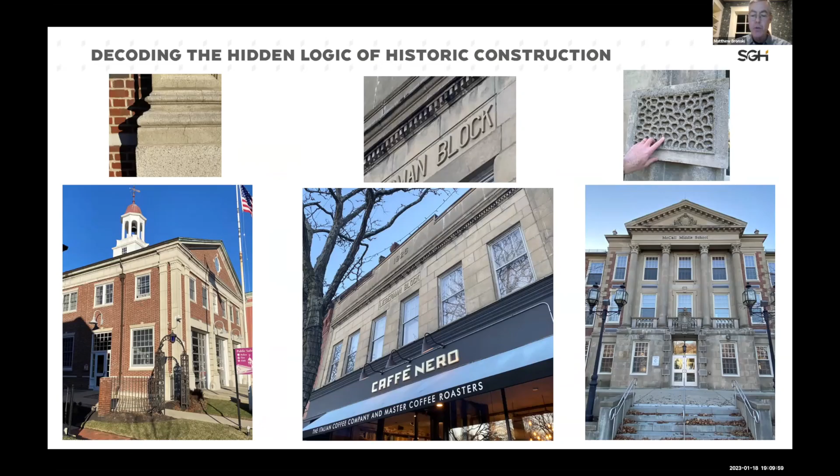There's Caffè Nero, really beautiful building, the Liederman block. And on the right, McCall, and a close-up of each of these. So kind of the big hint here is all three of these and the two prior materials that I just showed are all the same.

How about next? Let's look at our two bridges in the historic center. Same material. So if you guessed concrete, if you called it cast stone, if you called it architectural concrete, really technically it's all the same material and you would have been right.

So, you might not tell your friends, oh, Winchester Center is a really beautiful place. There's a lot of concrete. That's not how we usually describe it, but there is quite a bit there. It's just really beautifully designed, beautifully patinaed early 20th century concrete.

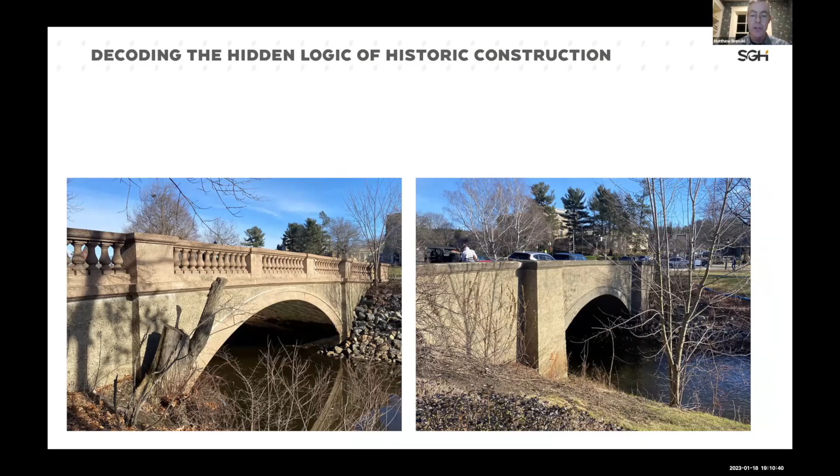So how about here? What material are these? So this is the Winchester Unitarian Church. That's the original 1898 portion of the building on the right, and that's the 1928 portion on the left. So from this distance, and I'm pretty close, probably 12, 15 feet away, those really look the same.

But in reality, the one on the right is natural limestone, and the one on the left is what's often called cast stone in the early 1920s, and what's really concrete, but it's just concrete that they went to great lengths and efforts to make it look like stone. So there isn't really a technical difference so much as there's an aesthetic difference.

So I hope these close-ups will help you in being able to tell the difference between the two. So on the left, you can see, and from that distance, they're really virtually indistinguishable. And even maybe from 6 feet, it's just really hard to tell, because they tried to make it look like stone, and they were pretty darn good at it in the early 20th century.

But when you get up really close, like you see here with my fingernails, the cast stone or architectural concrete on the left, what you're really seeing is little pieces of aggregate, little pebbles, little pieces of crushed stone, and sand, and cement that's usually tinted a beige color to make it look more like limestone. And you can see that up close. All the particles are about the same size pebble. They're all about Rice Krispie size or a little bit smaller even.

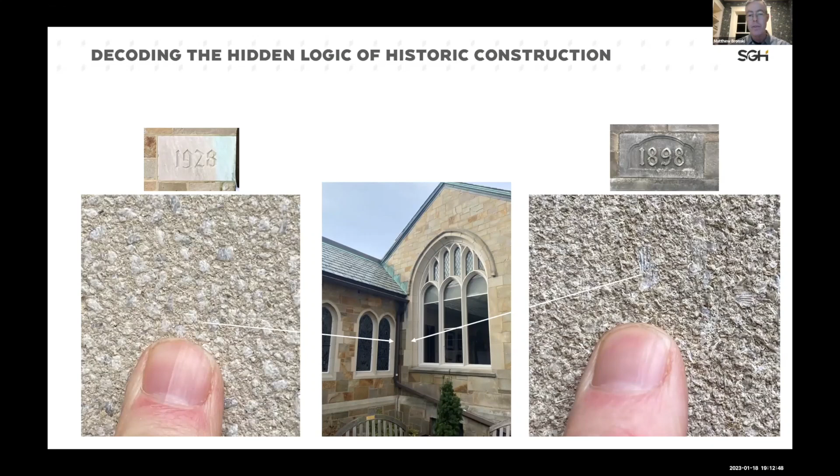And as you walk around Winchester Center, you actually see a lot of both. So we do have a lot of natural stone in the center. We have a lot of really good cast stone, and it can be hard to tell the difference. So going from left to right here across the bottom of the screen, here at the bank on the left, those columns are actually natural limestone. And even from this distance, you can see the swirly pattern of the natural sedimentary grains in the limestone. And the base is natural granite.

Now on the second one from the left, so this is the block where Starbucks is and where that courtyard is. So that's natural granite on the bottom. That might have been a later modification, just a guess based on the polished nature of that and the thin slabs. But up above, that is cast stone masquerading as limestone. And even from this distance, you can start to see the little tiny Rice Krispie size pebbles in there.

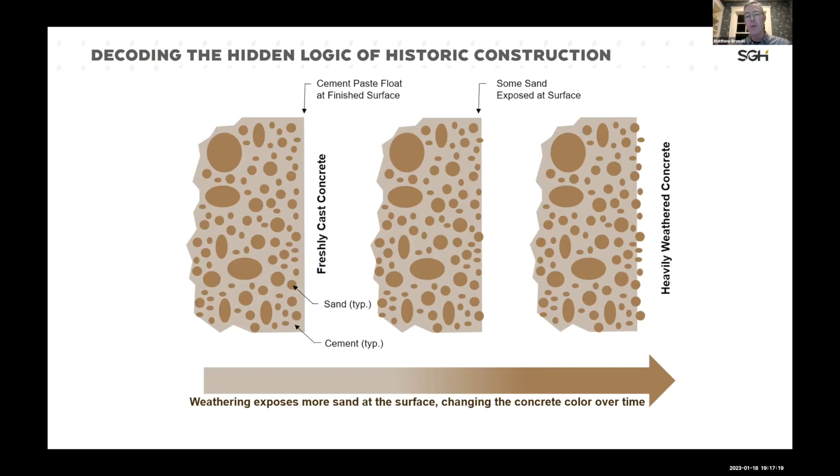So how about this beautiful bridge that we all know and love here in Winchester Center? You're seeing the aggregate exposed. It's taken on the color of the sand, that pinkish, warm aggregate color, really prominent today, and also a nice visual texture to it.

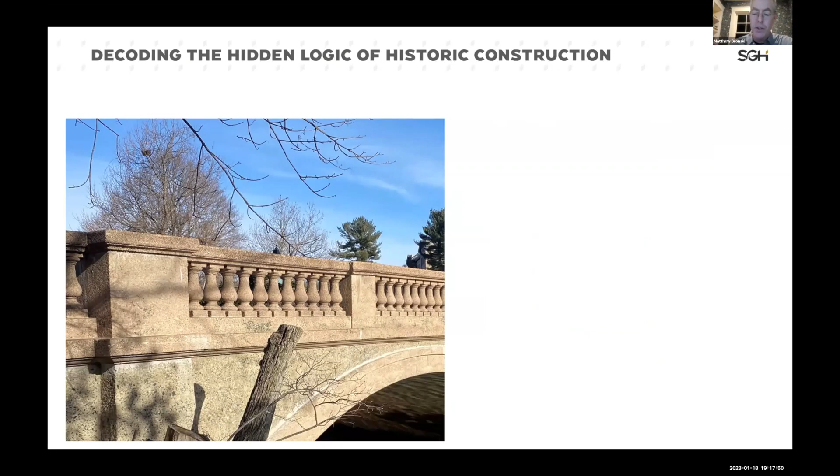So I contend that this looked pretty cold and harsh and smooth and not textured at all on day one. As evidence, I'll offer up a book that many of you probably have on your bookshelf at home. Let's look at this photo you've probably seen many times before a little more closely. Look at how flat and flush and stark and smooth that is — that's really the paste float. We can't tell so much with this sepia-toned photograph, but just by the amount of paste float there, you can tell it hadn't yet weathered to expose the aggregate. That was just the pure paste color on day one.

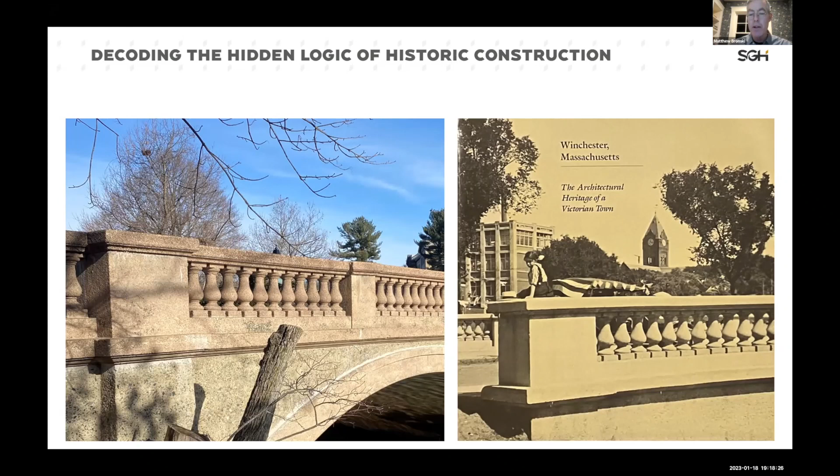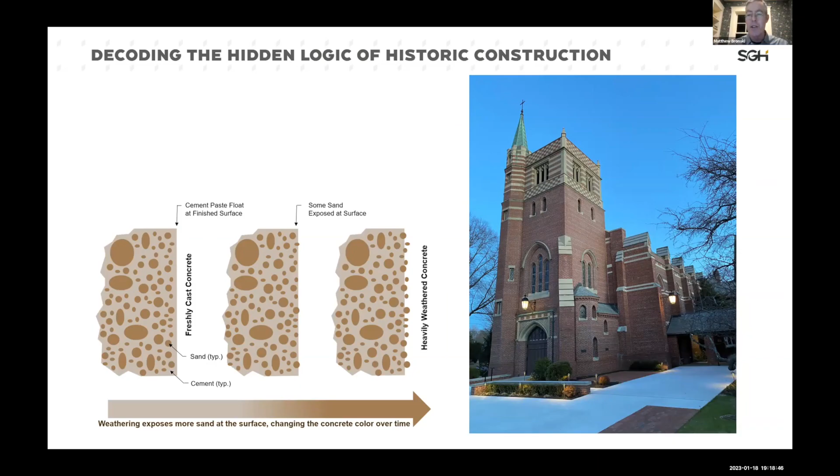So I contend that this bridge probably looks a lot better today than it did on day one. And when we see some brand new concrete, like the sidewalk here on the right, you might say, gee, I wish they had tinted it to match the more beige, warmer color concrete on the facade. But over time, it will gradually work its way toward that, and it will gradually get there. Mother Nature will help it along. So fear not.

You might have learned way back in architectural history class that the Greeks built with stone beams, post and beams and columns and lintels. And then the Romans came in and showed how to build with the arch.

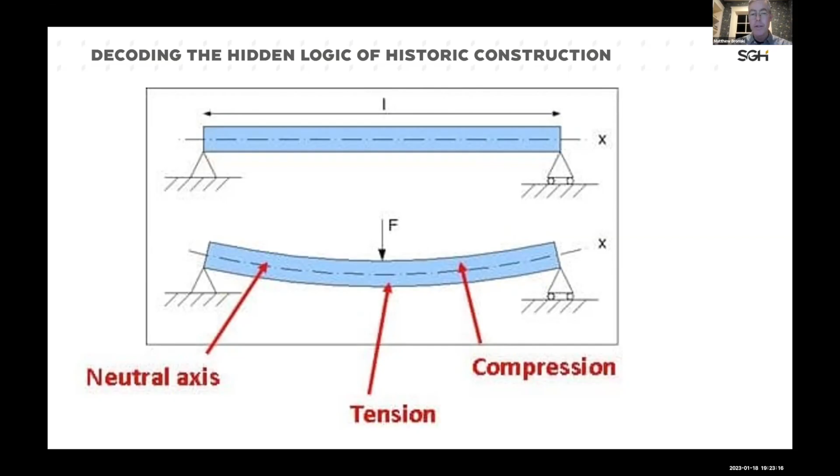So how do you build efficiently and effectively in stone? As you might have learned from the Romans, it's really with arches and vaults. The thing about arches and vaults is they use the stone material in the way that it's strong, which is in compression.

Just a little engineering background here. Robert Hooke, an early innovator in physics and structural engineering in the 17th century, said that as hangs the flexible chain, so but inverted stands the arch. Here are a few diagrams from my colleague and friend Paul Kasabian, who also teaches structural engineering at some local area colleges.

If you imagine a cord or a chain or a cable and we hang some weights on it, it will approximate a shape relative to the weights, their location, and the weight of the cable or cord itself. Here are just a few examples of that. What Hooke was really saying is...

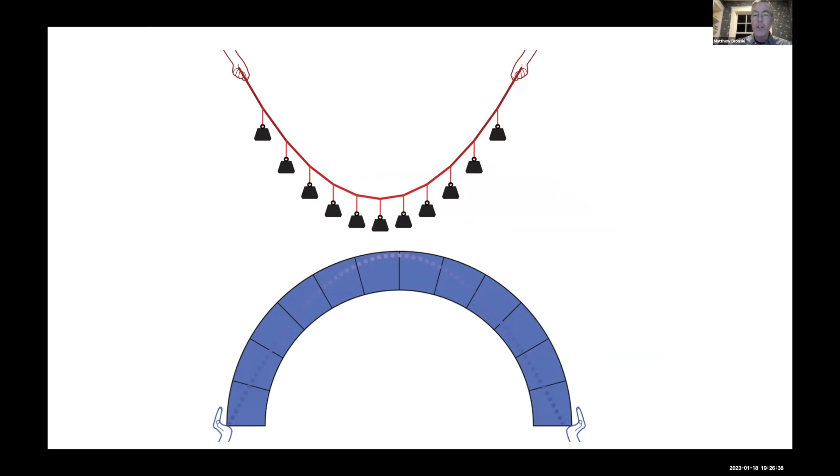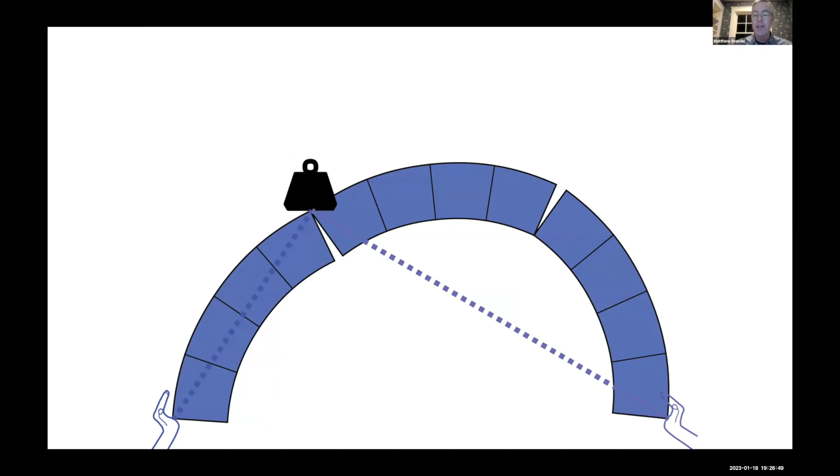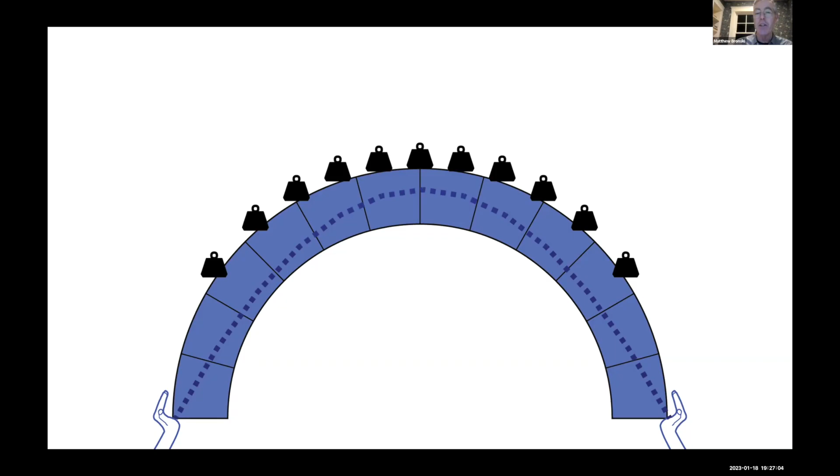If I go back for a second, that case is with a uniform loading, meaning we're loading the whole thing at once, pretty evenly, so it works really well for that. If it's designed for that and you load it eccentrically, meaning way off to one side with a lot of weight, that's when you can get a failure in an arch, so that's the case you want to avoid. Arches are very happy when they have a lot of weight on them uniformly and concentrically. They don't like a lot of weight in one place off to the side at an angle. Even a lot of weight right down the center is okay.

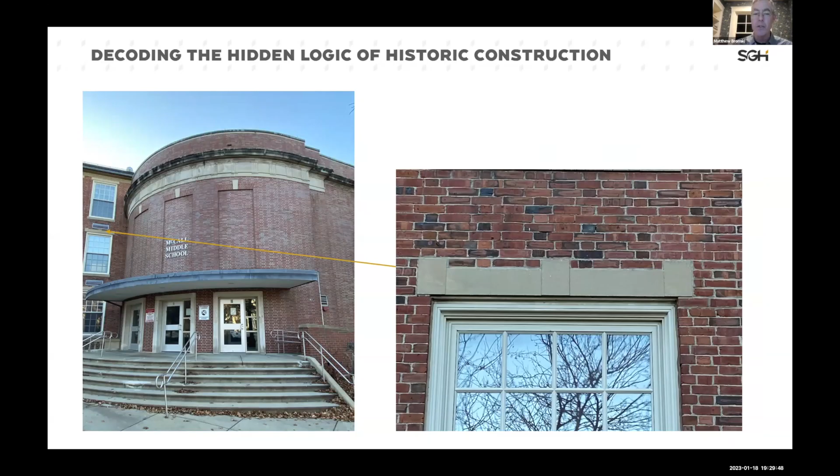It looks to me, I couldn't get up super close to check these for sure, but it does look like this one is actually a concrete lintel that's just kind of decoratively cast in that form to make it look a little bit more like a flat arch with a keystone.

How about these two on Lincoln Elementary? From a distance, that bottom one sure looks like a lintel, right? It's just kind of a rectangle, maybe some relief or carving in it, but it's fairly uniform, just going right across the opening. That upper level looks like it could be a flat arch, kind of looks like a keystone, and the edges are splayed. So from a distance, I would think lintel on the bottom and flat arch on top.

But this is really interesting. When you look at these closely, first of all, they're not stone and they're not cast stone. These are architectural terracotta, and they are flat arches. What's interesting is the one at the top more or less corresponds with what you see from a distance, but they've just created an extra joint, so from a distance it looks like 3 pieces. Up close it's actually 5 pieces, with an interlocking, almost puzzle connection between them, so as they were setting them, they were stable just as they dropped them in, which is really clever.

On the bottom, it's actually kind of the same thing structurally. When you look at how the pieces work, it's a flat arch with very similar joints, but they've just articulated it differently to make it read different visually. So very, very clever engineering and architectural interface here on the side of Lincoln.

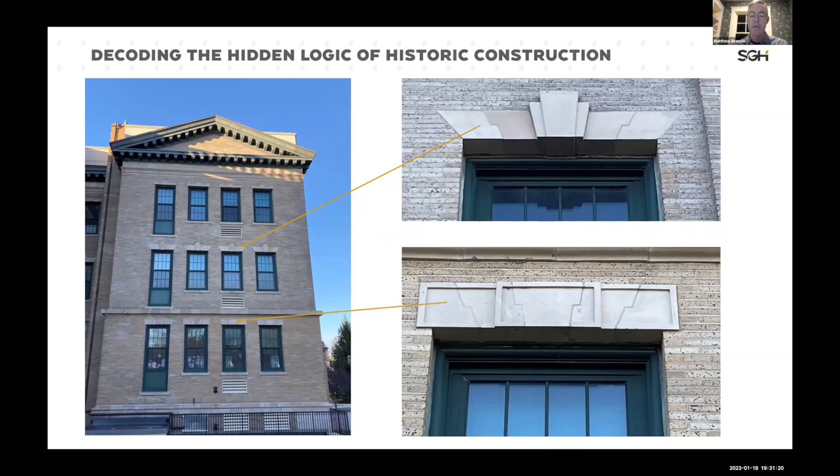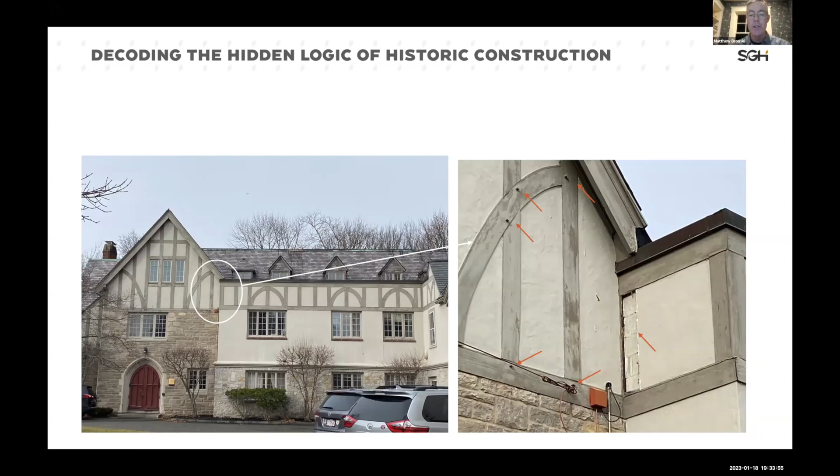So what about the overall form? Maybe just to refresh your memory before I move on, take a look at the profiles. Look at how the first floor steps out a little bit, the second floor a little bit more, the third floor or gable ends more, and even the roof more beyond that. So it's a constant out, out, out, out on all these facades.

So is that just purely stylistic? Where does that come from? Sometimes you hear people say that back in that period, they were just trying to eke out any sort of space they could get in the dense medieval city. It was very congested and crowded, and they were just trying to pick up a little more space on the upper floors out over the street.

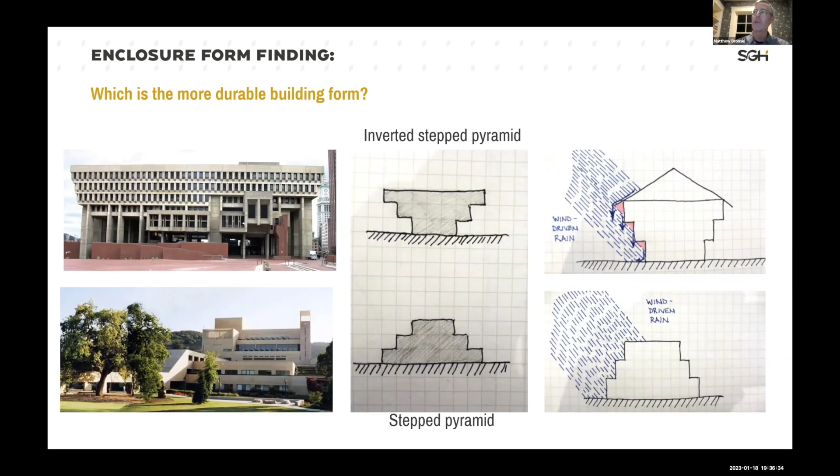So it was essentially like wicker, like you were weaving a basket. That was filled and packed with, sometimes clay, sometimes a lime-based stucco, but all those materials really didn't like to get wet. So this form was a way to take those moisture-sensitive materials and really protect them well from the weather.

So you look around and we have a lot of building forms like this in New England. Here's the Paul Revere House, the second oldest building in Boston, from 1680. You look closely and it really has that inverted step pyramid form. The early English settlers had learned that building form and brought it over here with them. Even though they weren't exposing the frame anymore and didn't have wattle and daub - they had clapboard protecting it - they were still building in that same form.

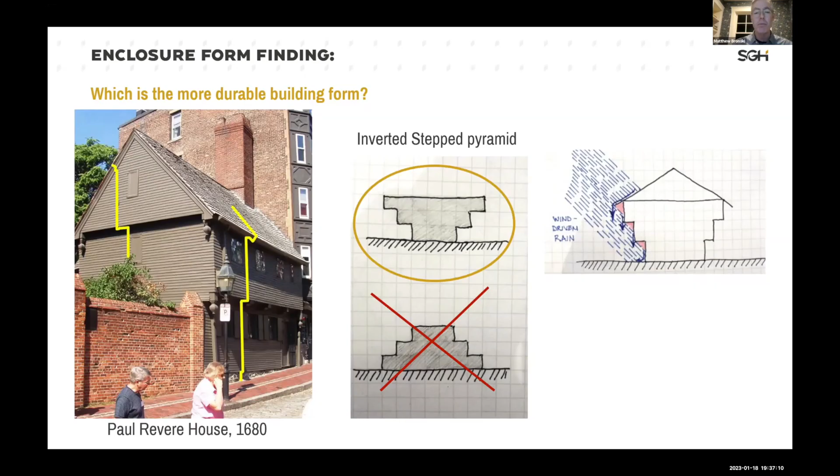And actually, as you look around, really other periods and styles show this too. Going from left to right: the Paul Revere House, then early 19th century Greek Revival, late 19th century Queen Anne, and on the right, some early 20th century eclectic or period revivals, like the Tudor revival. You'll see that form again and again. It's sometimes very subtle, but once you start seeing it, you'll walk around Winchester and say, oh yeah, there's another one - and you'll see them again and again.

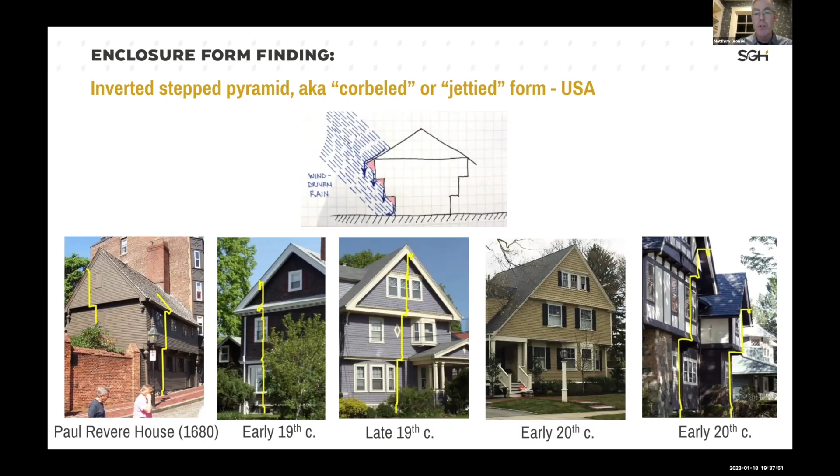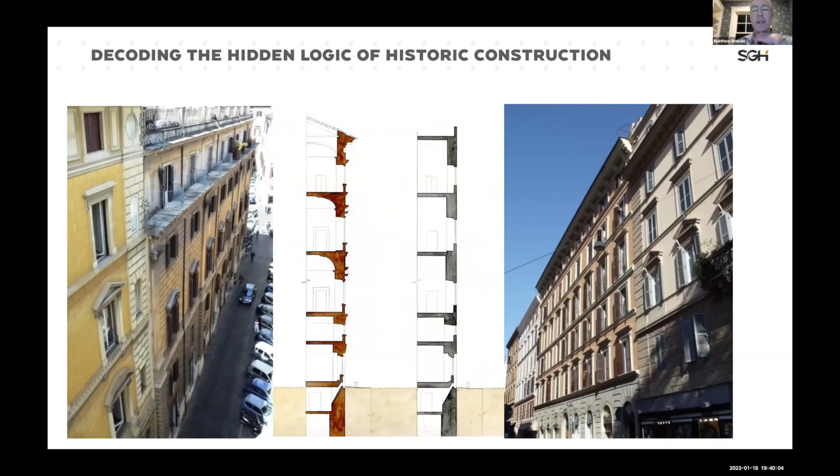So if it did not have any construction logic, you could take a facade and just strip all that and say that's just kind of ornamental frippery we don't need. We could just clean it up and have it purely planar. Why do all these buildings have it? So in the center, I've kind of drawn a section of one of the buildings I studied when I was in Rome that has all those articulations, and then kind of a conjectural modern version of it where everything is just purely clean and flat and planar. So if it's not doing anything for a living, you could make that adaptation or change. If it is, there might be some consequences to that. So long story short, these actually are important, and here's why.

So these buildings in Rome are thick, load-bearing mass masonry buildings. So the walls are very thick. Often they're on the order of 3 feet thick, and all the floor loads are carried on these very thick stone or brick walls. There's no waterproofing, there's no underlayment, there's no felt paper, none of those other things that keep our kind of wood frame houses here in Winchester dry. So the way they work is, even if they're perfectly pointed, even if the stucco is freshened up, stucco, brick, stone, mortar, all those materials are porous and absorptive, and they take on water every time it rains. And it rains a lot in Rome.

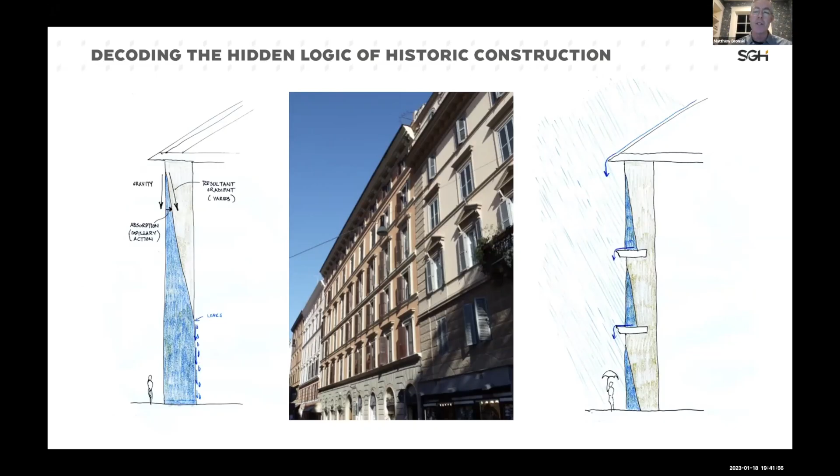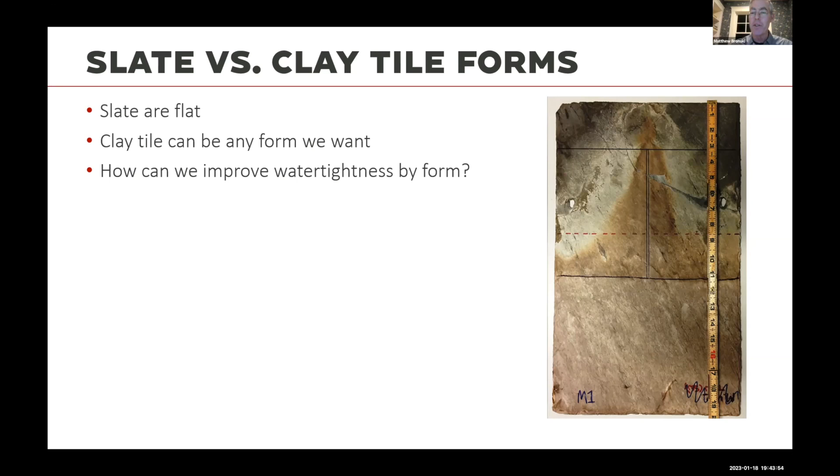And then really you think about, well, how am I going to put these pieces together? Well, rather than just being totally rectangular, you want to kind of funnel that a little bit. So one shingles into the other, kind of like a series of funnels. So on the far right, here's a new clay tile roof being installed in Rome. And you can see that's exactly what it is. It's a series of funnels coming down.

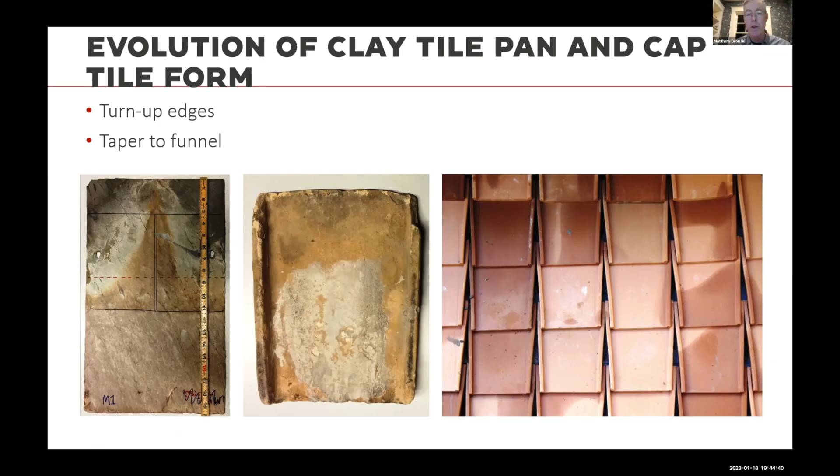And then the only remaining problem is, okay, we've got all these gaps between our funnels. This is called a pan and tile roof, or pan and cap roof. And then we need something to cover those. So here's what they have. They have kind of a half cylinder that tapers the other way. So those all kind of lap over each other, shingle downstream, all the water shingles downstream.

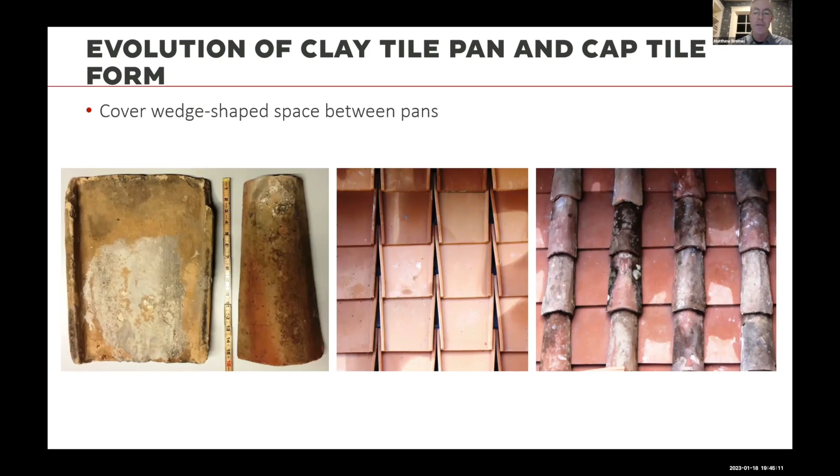And this is the most common roof form in Rome for the past 2,000 years, a pan and cap tile roof. So you see how it's put together. You look at the pieces, and it's almost like it designs itself once you really understand how water flows on it. And that's really why it's worked so well for 2,000 years.

So are those just purely stylistic? Do they really do anything for a living? So really they're doing a couple things. So I'm going back to Rome now for a minute. So we just talked a lot about water. So first and foremost, they're shedding water.

And think about the days when windows were just pieces of wood, pieces of glass closing against stone. It was before the days when we had gaskets or membranes or any of these things that keep windows and doors and storm doors tight today. It's just wood on stone or wood on wood. So really to make those windows work well, you try to divert as much water away from them as you can. Again, just like the overall facade form was doing, you're trying to protect them and shelter them.

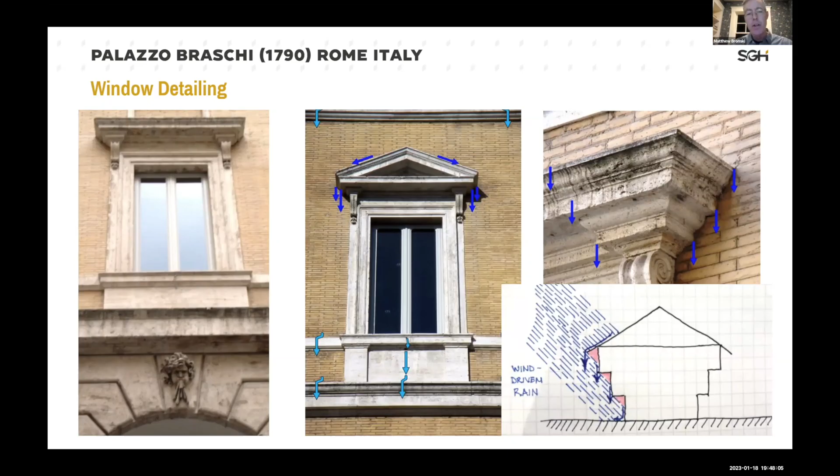So again, if you look at this window hood in Rome and the details of it, particularly that bracket on the right, how everything overhangs the thing below, keeps projecting out. It's again almost like a microcosm of our inverted step pyramid form that's worked so well for so many centuries, transcending periods and styles.

And just one kind of really fun additional side note on this particular building I studied in Rome, Palazzo Braschi. So this was a 1790 building, not particularly old by Rome standards, but built as buildings were there for hundreds and hundreds of years in this kind of form. And I noticed on these window surrounds that there were two holes in the same place on every stone surround. So you see the yellow and red arrows here, a close-up of them here.

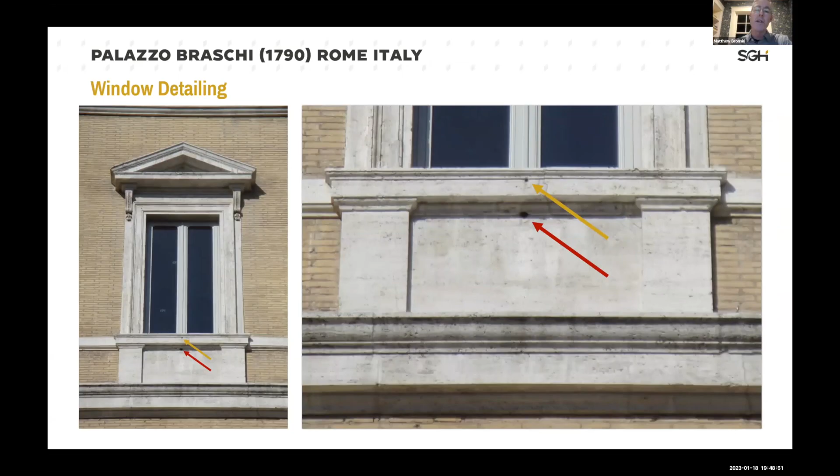And of course, buildings that are hundreds of years old in Rome have a lot of holes in them where this has been hung or that has been hung at one point in time. But seeing the holes in the exact same place on every window, something intentional was going on. And what this was, again, the difficulty of making windows watertight when it's just wood closing on wood at the meeting rail or wood on stone at the edges.

And I did see this on a couple other buildings there as well. So it wasn't super common, but I did see it on at least 3 buildings. So really pretty remarkable foresight in design logic and construction logic, and how to make things watertight when your palette of materials is pretty limited.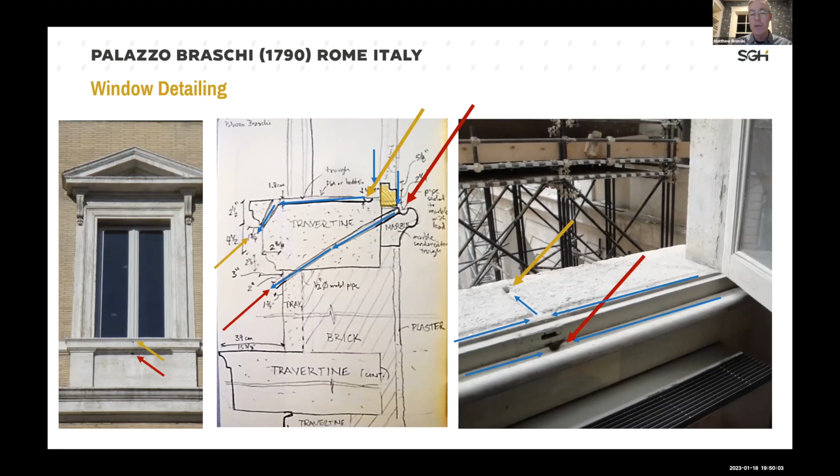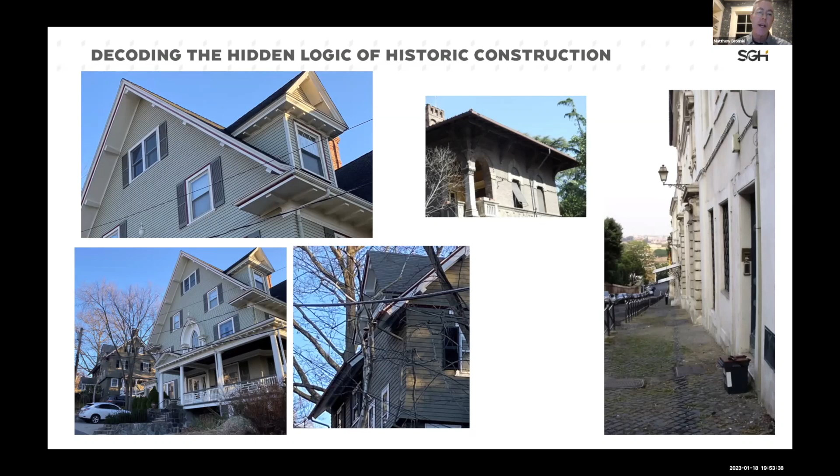In Italy, a 2 or 3 foot overhang is not unusual at all in Rome. The photo on the right is a school right in our neighborhood that I walk by every day, and the overhang on that roof is only about 1.5 feet, which is pretty modest by Roman standards. But you can see from that line in the ground, where I'm running my cursor, that the sand and grout between the cobblestone paving has eroded away. Just with that 1.5 foot overhang, it really protects the wall, in this case stucco and brick, from that runoff. So roof overhangs really protect siding and make siding last, just as much in Winchester as in Rome.

On a related note, if your roof overhangs pretty far, as in these examples, you need some way to support that. A lot of times people look at the scrolls, brackets, and modillions and think they're purely stylistic - oh, that one's Italianate, that one's colonial revival or craftsman. But in this period, they were typically serving the function of helping to support that roof overhang. Today, on new construction, they're often decorative - they construct the roof support independently as a ladder truss or something else, then apply those after the fact. But in this period, and in older European construction, they were working very hard to help support that roof overhang.

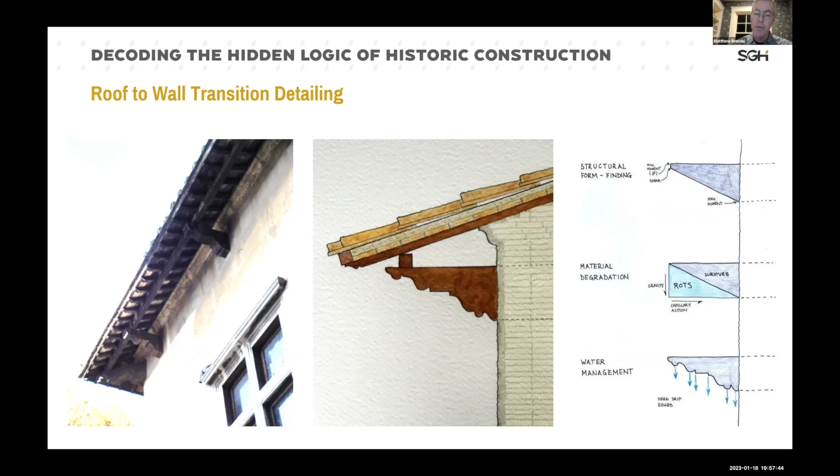Well, if you expose that end grain to the weather, the end grain will take on the water - we'll see that same absorption gradient of water, and the bottom part rots. So it's almost a case of cutting out the part you don't need before the cancer can form of wood rot or fungal decay. The third part might be, why not just cut it off on the diagonal? Why do you need all those little doodads? What all those ornamental, quote unquote, doodads really do is give you a whole series of drip edges. Because of this generous roof overhang, this structural element hardly ever gets wet, but when you do get the very rare completely horizontal wind-driven rain and it does get wet, it's going to shed that water very quickly because of all those de facto drip lines. So it's both beautiful and really well thought out in terms of water management and durability.